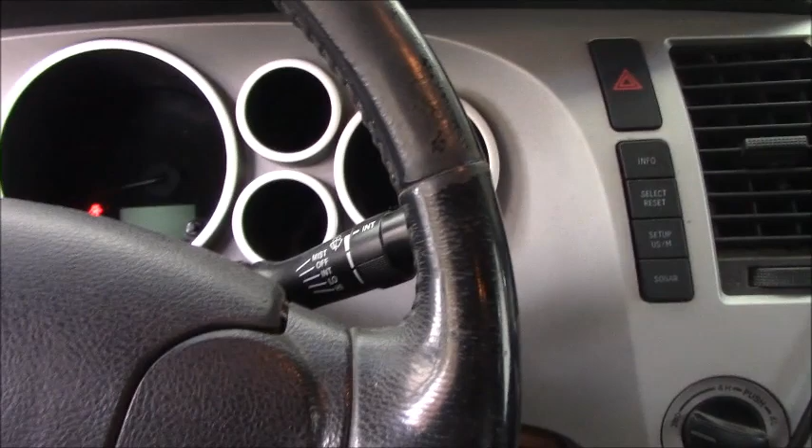So today we're working on a 2007 Toyota Tundra. The vehicle came from another shop with the complaint of no charging. As you can see right now, I will turn the key on. As you can see, the battery is something like 12 volts. You see the battery icon right there. So I get it started, and you can see right there on the gauge.

As you can see, charging and then back. So as you can see right now, the battery icon is lit on. What does that mean? That means it's telling you it's not charging, but the gauge seems like it's still 12 volts. Very interesting.

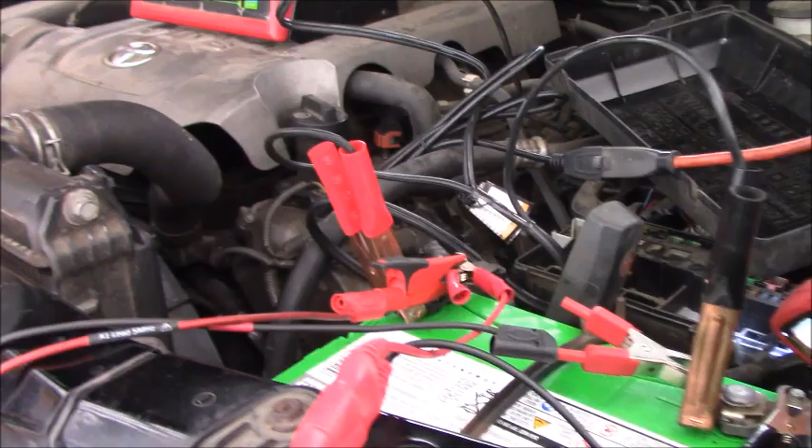So I have my charger hooked on the battery here. As you can see right now, the engine is off, and I measure here. As you can see right now, it's 12.4 with the charger on. So let's go ahead and start the engine, and measure from here to see if the alternator is charging or not.

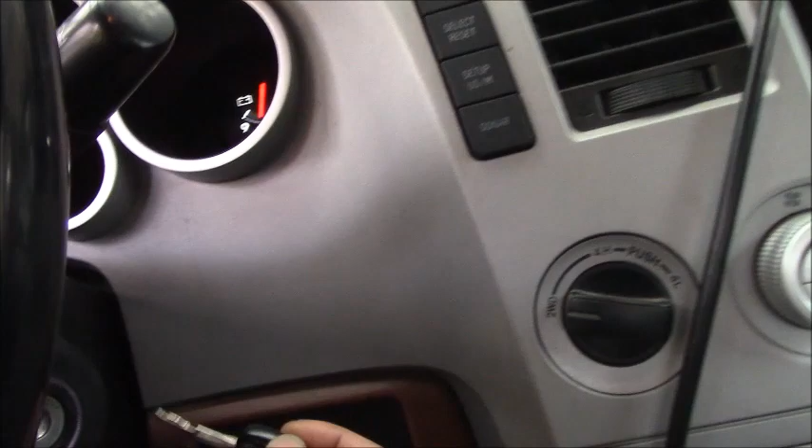Okay, as you can see, the battery light is on. You see the battery gauge bouncing back and forth and staying at no charge. Okay, so back out under the hood to measure. Sorry for the flare. As you can see right now, it's only 12.5 volts with my charger hooked on.

Let me remove this. As you can see the spark there. See that? That means the charger is charging the battery. Measure again. Right now it's 12.32. So let me put the charger back.

Okay guys, as you can see, after the problem, the vehicle has had a new battery put in, and I already removed the lower covers. As you can see right now, the mechanics put in a new alternator. As you can see right there, we have a new alternator, but still no charging.

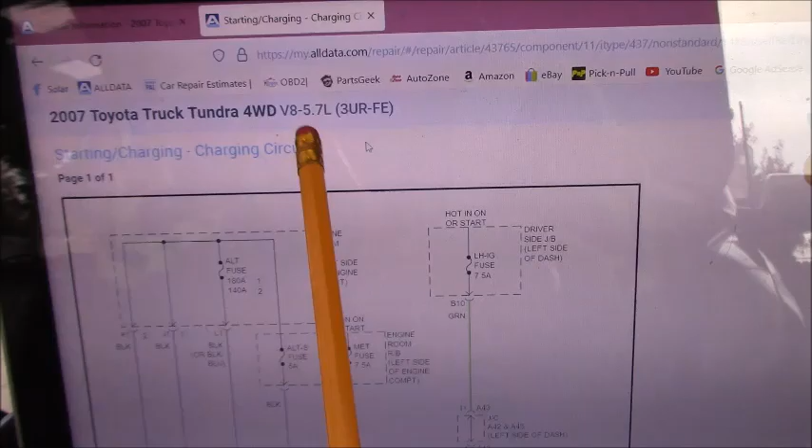Okay guys, accessing the wiring diagram. As you can see, 2007 Toyota Tundra 4-wheel drive 5.7 liter engine. The charging system is like this. Let me zoom out a little more so it's easy to see. This is the alternator. As you can see, we have this cable connected to the battery, with a 180 amp fuse.

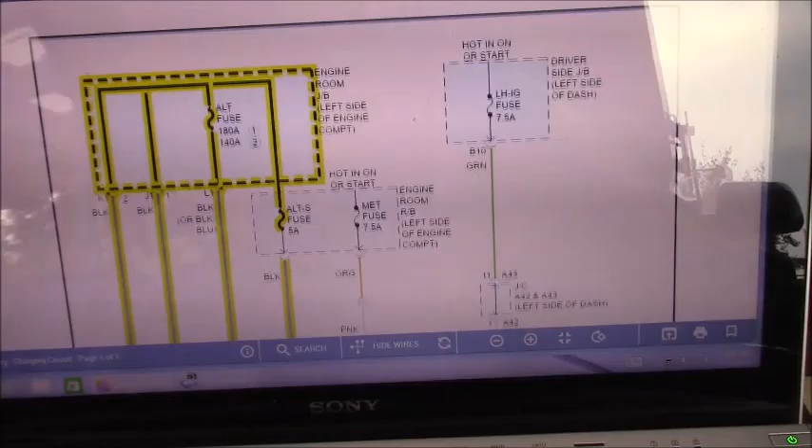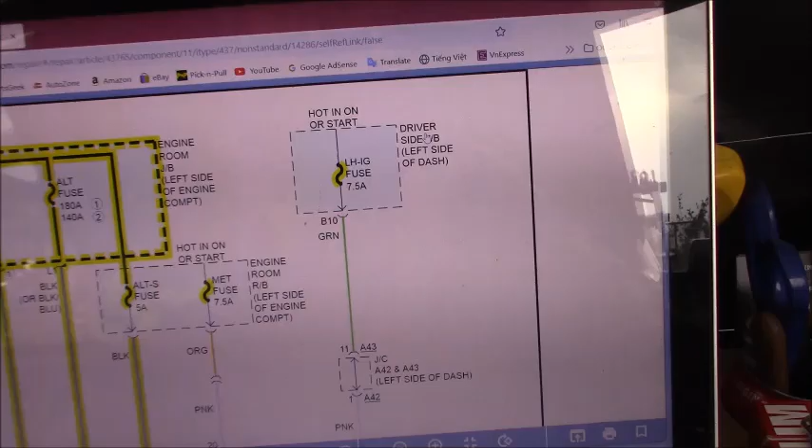So this fuse I already checked. We have the power here. This one's hot all the time, right? And this one I already checked, it's hot in run and start. And also this fuse, as you can see, is hot in on or start. Also checked it. This fuse is on the driver's side, left side of the dash.

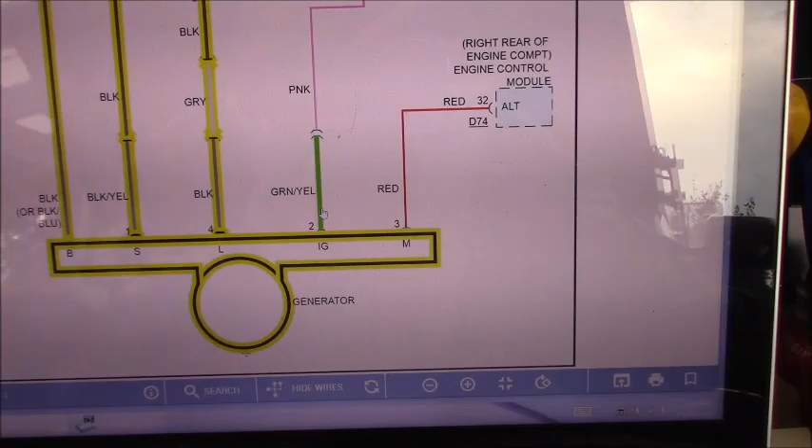That means we have two power supplies to the alternator, one with the black and yellow wire, and I also checked the voltage drop from here using the test light. We're okay with the fuses, no broken fuse at all, and we also checked here with the test light, there's no voltage drop, it's good. And also the green and yellow, checked for voltage drop with the key on, it's okay, no voltage drop.

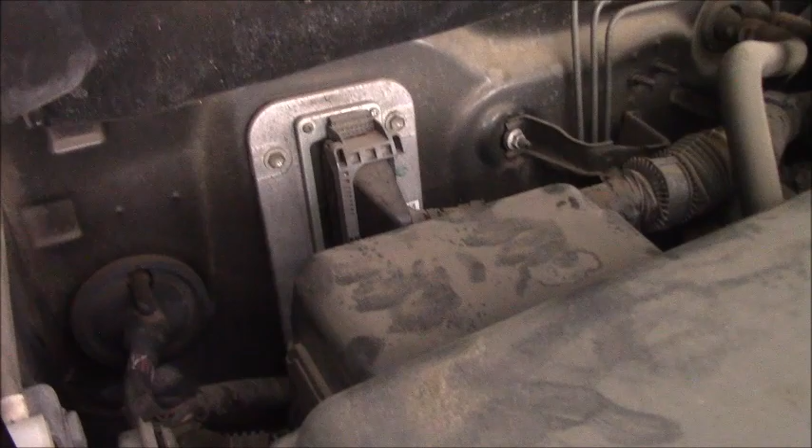But this red wire is controlled by the engine control module. It's right here in the engine compartment. Okay, this is the engine control module. So now, like I told you guys earlier, I checked all the fuses. Also checked the voltage drop on the wires, green and yellow, black and yellow, no voltage drop. We have good power supply to the alternator.

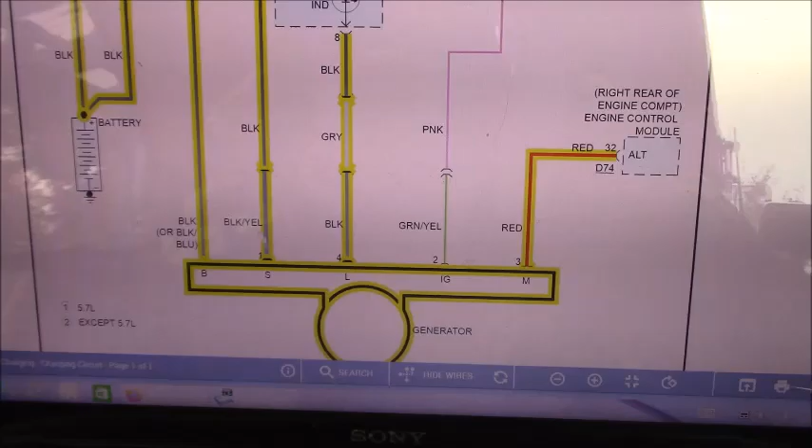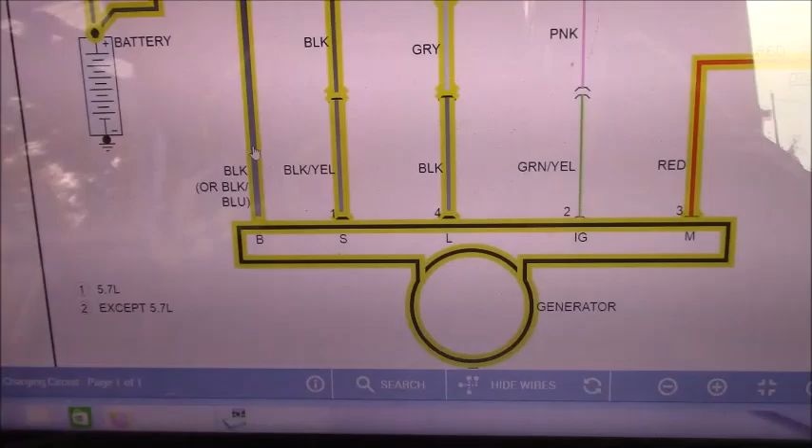And I also checked right here at the alternator, still no charging, not only checking at the battery, because if this wire is open, the black or blue or black-blue wire, there's also no charging. That's why if you check on the battery only, there's no charging, but sometimes it's charging right here. You have to check right here to see whether, when the engine runs, it's 14 volts or 13 something volts or not, in case this heavy wire here is an open circuit.

Okay, so this alternator is the new one. The owner told me the mechanic put the new one in, and it's still the same problem, it doesn't work at all. So now I'll try to hook up my channel here with my oscilloscope and see how the computer does the duty cycle on this wire to control the alternator.

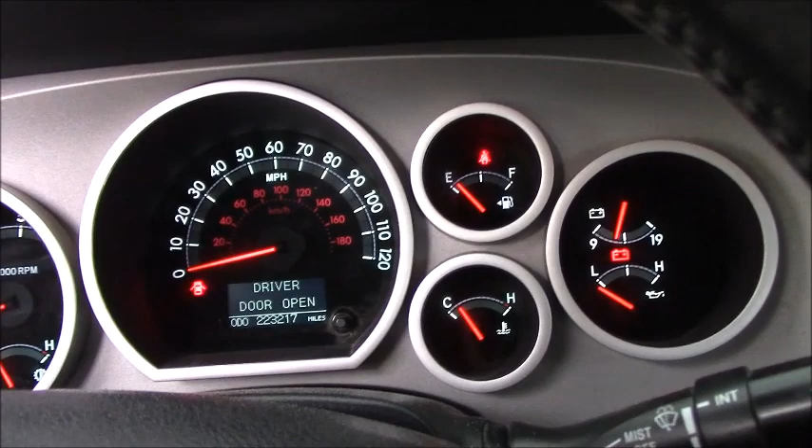Alright, okay guys, as you can see, the vehicle is not charging at all, no matter the new alternator and new battery. So let me start it again, and you see the battery light there, and the gauge is at about 12 volts. Let me start it.

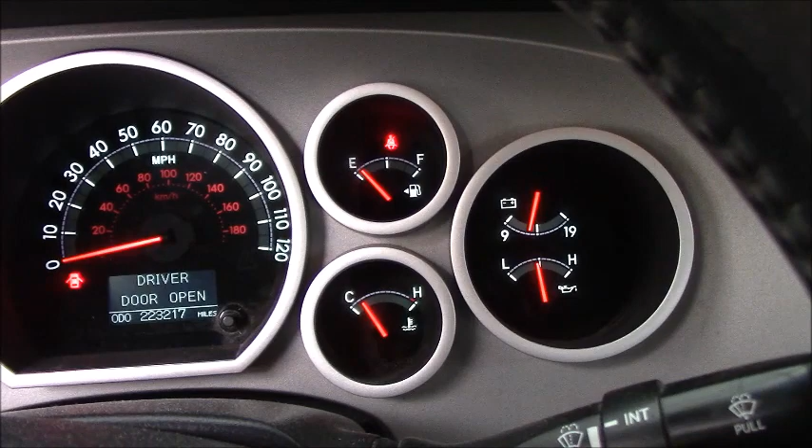You can see it looks like it's struggling to start, and then it starts, but why is the battery icon up? That's the question. Very interesting. So let me turn it back, key on, and

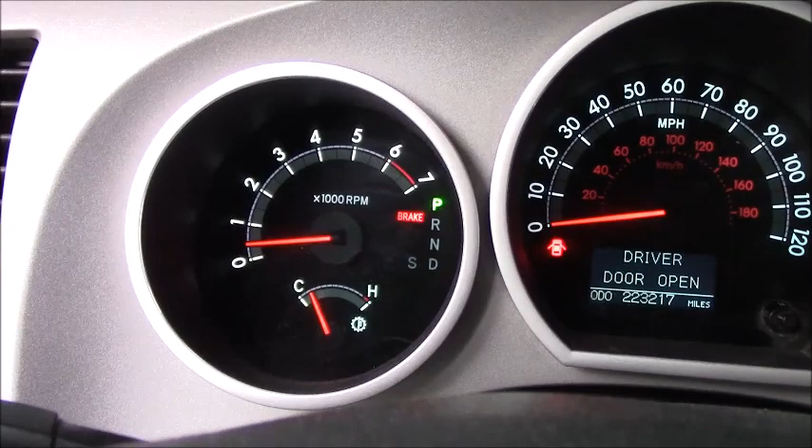in this case, like you guys see, the computer is involved in the charging system. So I know when the engine starts, there's no check engine light, like you can see the check engine light there. Let me start it. Yeah, no check engine light. Okay, no battery icon up here. So let's turn it off.

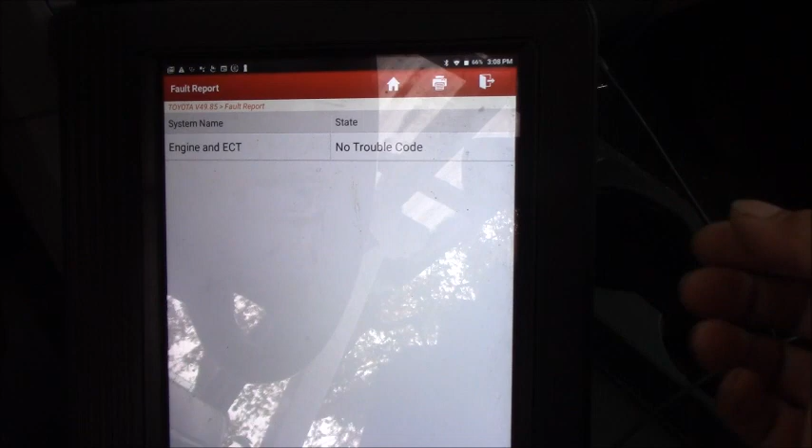Now I would like to know, no matter there's no check engine light, I need to read the fault code and see what the computer says. As you can see, no fault code. Okay, and anyway, no help at all. Okay, let me hook up to the...

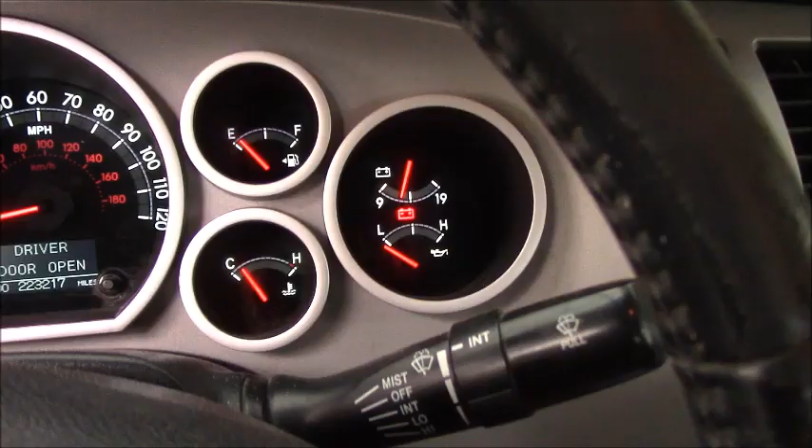Okay guys, now I run the PicoScope to see how the computer controls the alternator for the charging system. So I have channel A connected to the computer control of the alternator by the alternator connector, and channel B I connect to the battery, reading the voltage. Okay, as you can see, I have channel B connected here, and

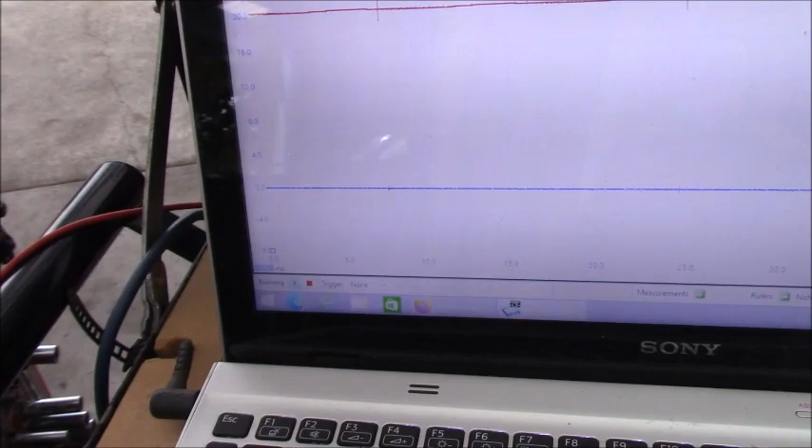it's right here. So on the battery positive and battery negative for channel B to read the battery voltage, to see any charging, because when we start the engine at first, as you can see, the battery gauge tries to increase and then takes a few seconds and goes back. So right now, channel A is reading 0 volts because the key is off.

Let me go turn the key on. Yep, right now the key is off. I can see from out there by my laptop. Okay, the key is on right now. From there you can see we have the duty cycle from the computer. And you can see we have the duty cycle, right? Channel B, channel A.

Okay guys, right now key on, engine off. As you can see, the computer tries to control the alternator, sending the duty cycle. The battery voltage is still there, and I will leave the camera here and go inside the car, start the engine. You can hear in the video the engine start. So look to see if the duty cycle control is still here or we miss it. Okay, I will start the engine right now.

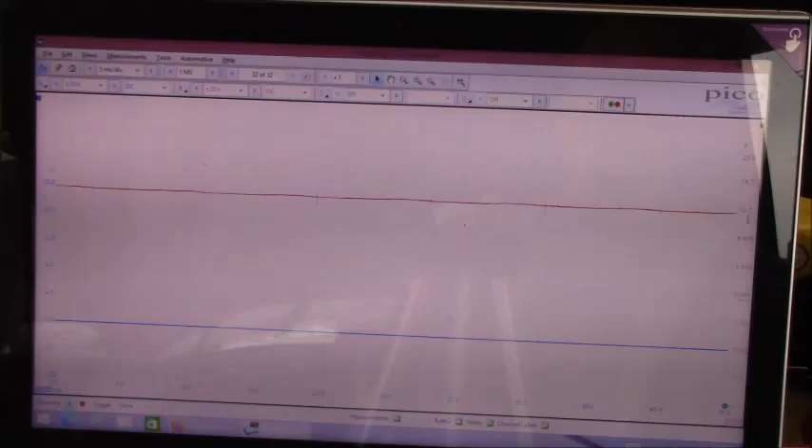Huh. Very interesting. So let me change the timebase to 5 seconds. As you can see right now, no, I can get this a little more, like 10 seconds. Yeah, 10 seconds is good enough for me. It's time to go back and forth. So I will rev the engine again, and then check on the laptop to see what it is.

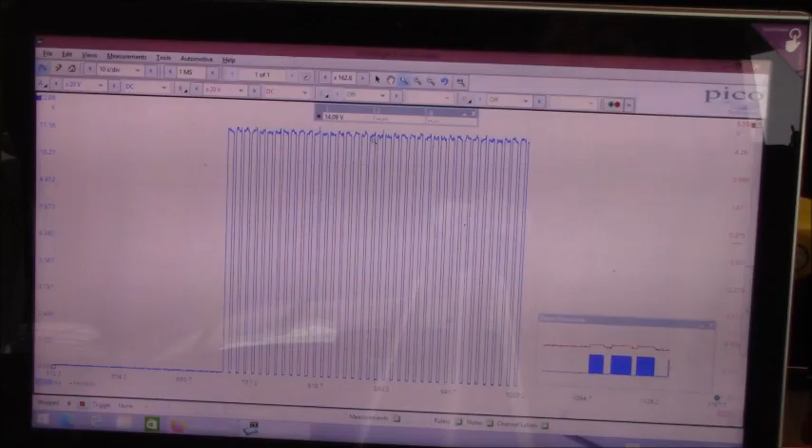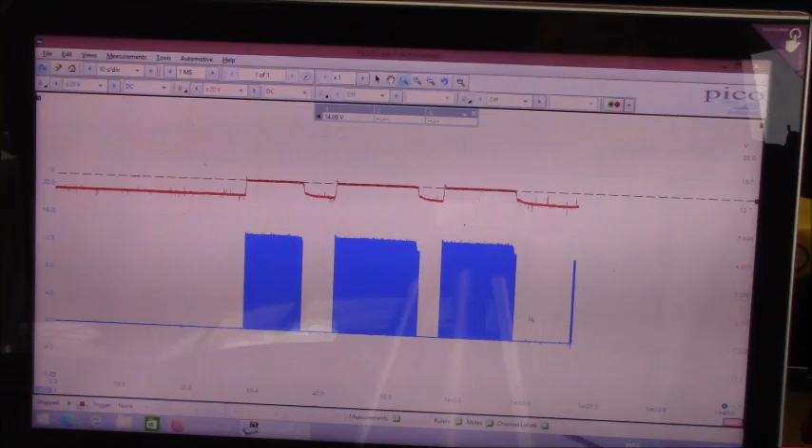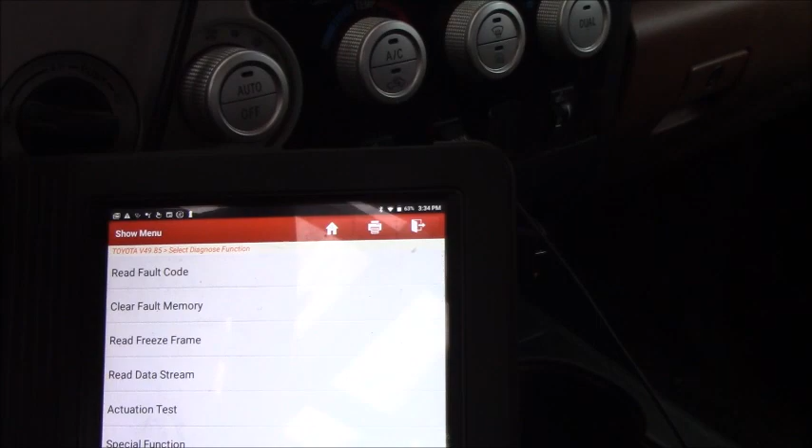Okay, the question now: did the new alternator fail, or did the computer stop controlling the alternator? Okay, let me see. Let me go back here on the scan tool. We pull up the data stream. Come on. Okay.

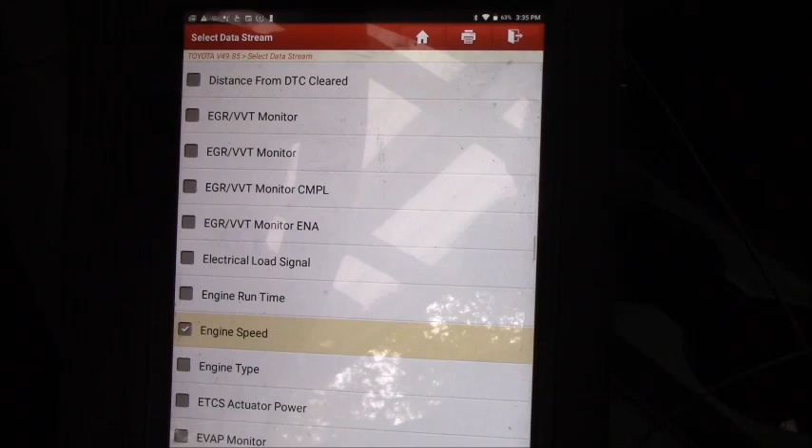Put the battery voltage, and we put where the letter E. Engine speed. Okay, that much I want to see. Okay, as you can see right now, the engine stopped. It stopped by itself, I didn't turn it off. So let me move the chair far enough for me to use the pedal. Okay, as you can see right now, I can start it.

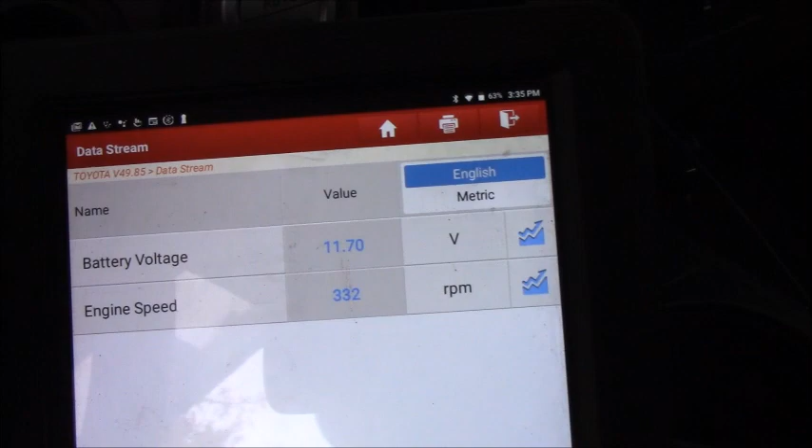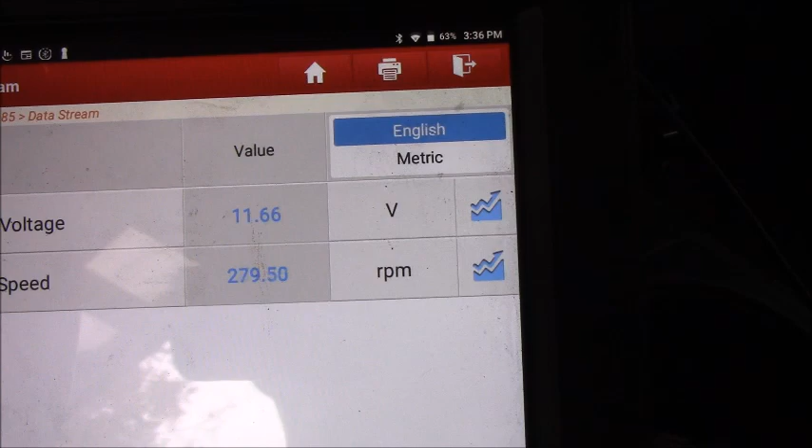As you can see, the idle of this engine, and you can see the idle here. The idle here, that's why it doesn't start. Why this car, the idle is too low, that's why it doesn't charge the battery. Okay, now I found the problem. Okay, let me rev the engine up a little. Oh, it stopped now. Let's start again. Okay, at least we have 600 RPM.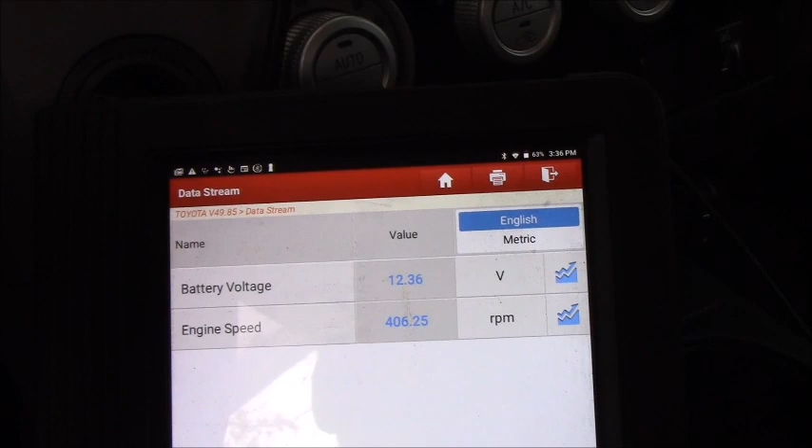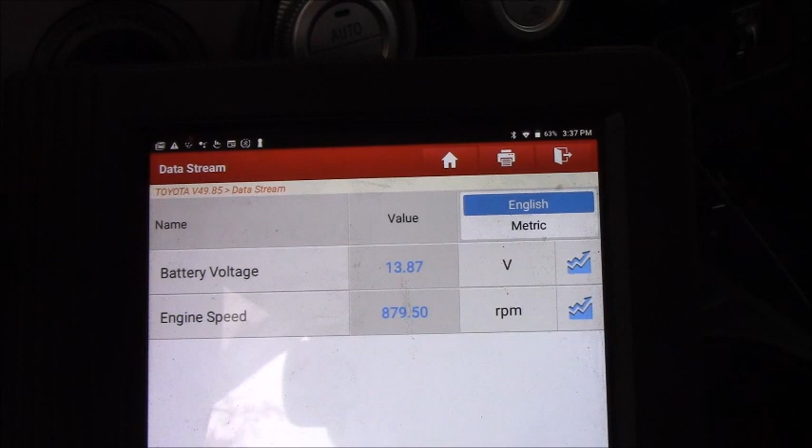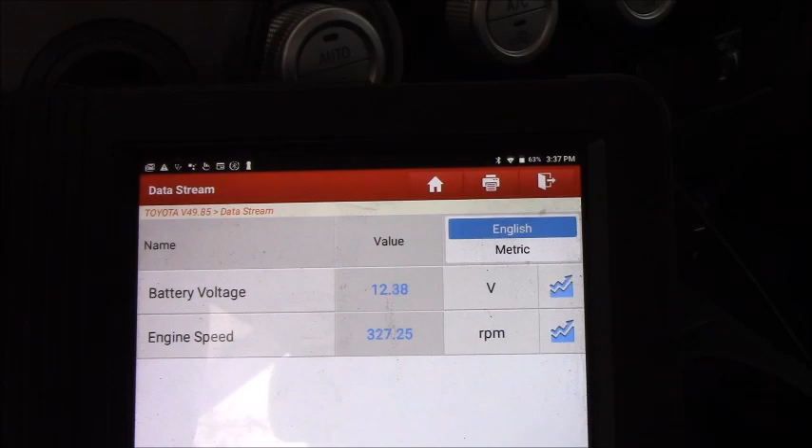Okay, now you can see 13 point something volts right there. As you can see, it's almost in the middle, that means it's charging. Okay, as you can see the RPM now, I cannot hold it steady at 600, but I believe at 600 it is charging. Okay, now it's charging, you guys see that.

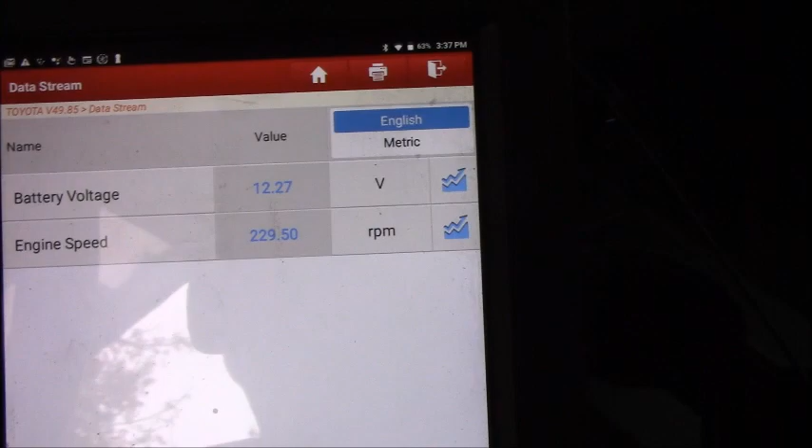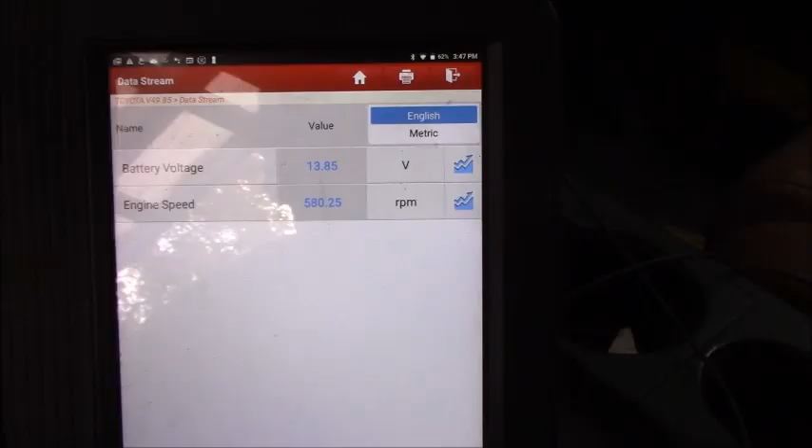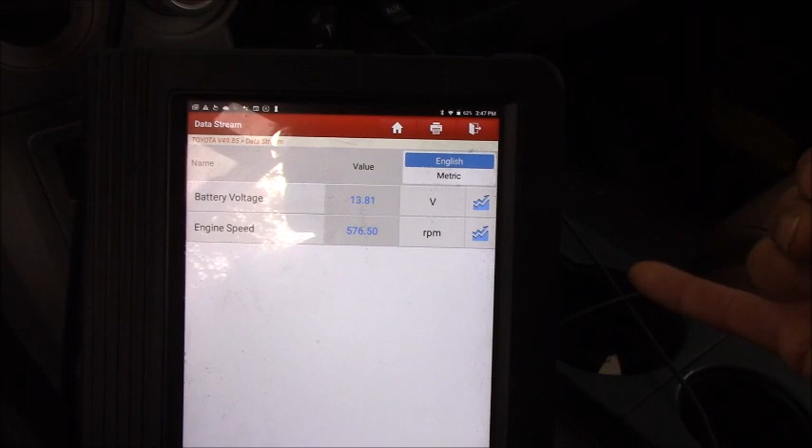Okay, let me do this. Turn off the engine first. The engine is off now, key on. Let me go back from here, go to special function. Damn, we don't have the idle learn for this. Okay guys, as you can see, I'm looking for the function to relearn the idle on this vehicle, but it seems we don't have it.

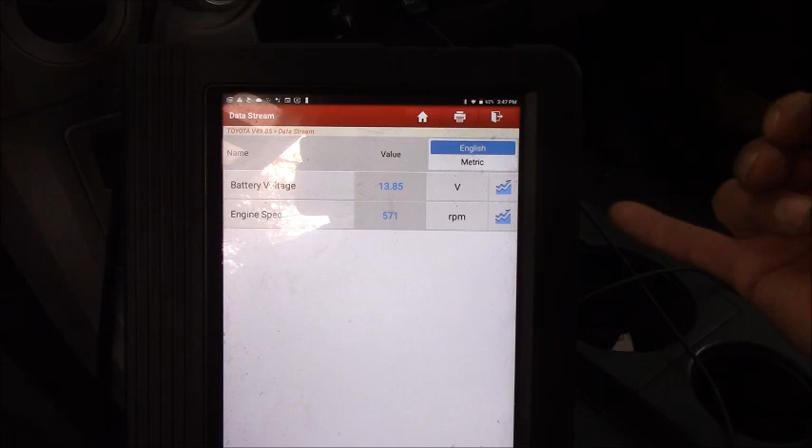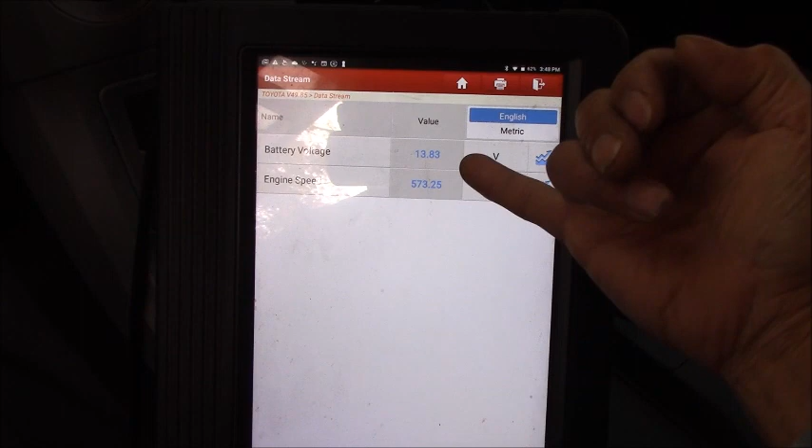The way I know Toyota, after you change the battery or disconnect the battery, sometimes you get a problem with the idle. And in this case, from the beginning, I didn't see the idle was too low. I didn't pay attention to that, and now I found the idle too low, that made the alternator not charge at all. And as you can see right now, 5 something RPM. Why? Because I want to let it run like this. You see 5 something RPM, the alternator is charging the battery. Right now 13.8, almost 14 volts, is good.

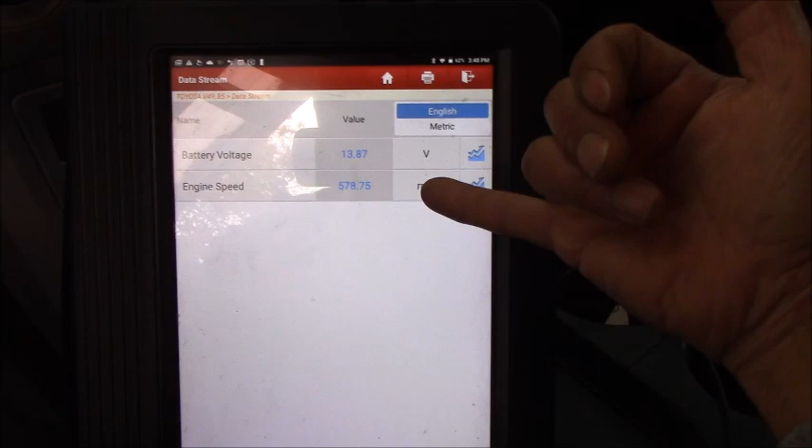And how I have this RPM right now is because I use the pry bar. I set it on the pedal and against the seat, move it a little bit and let it run for about 10 minutes to see. I think the idle will go back. Right now you can see it's 5 something RPM. Okay, back to the laptop, and you can see it's charging. Right now charging, you guys.

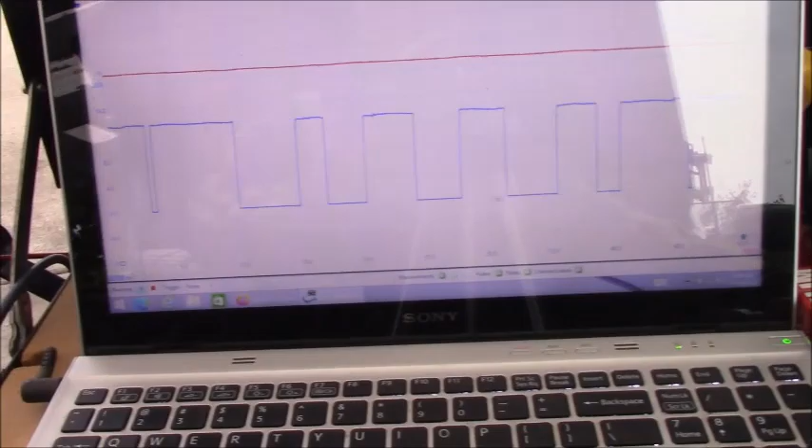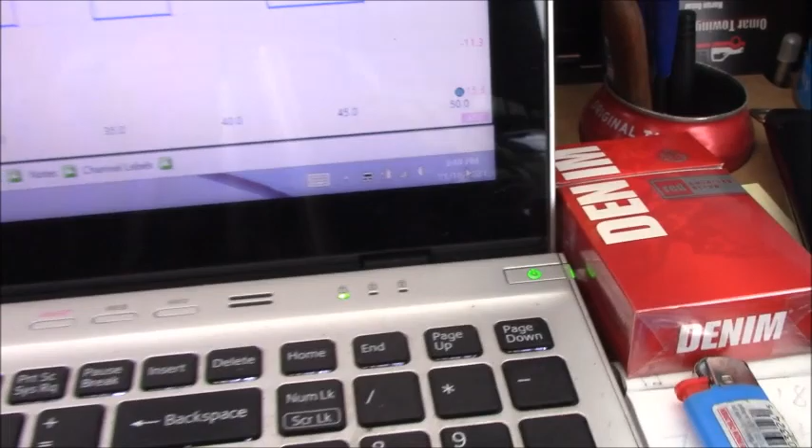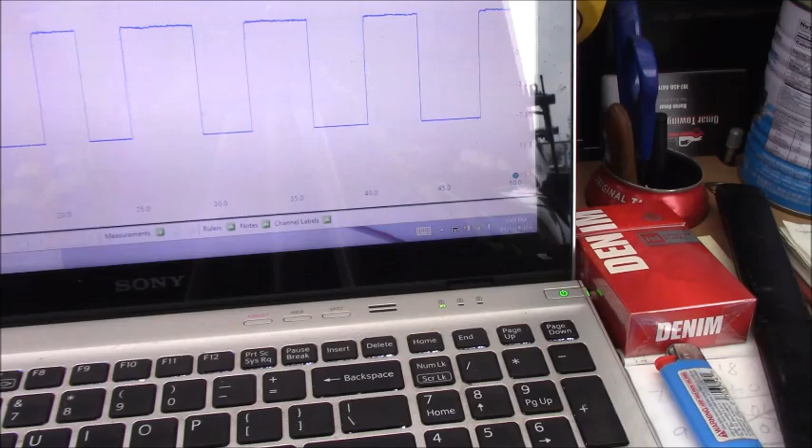And let me see the voltage here. Yeah, about 14 volts, right? 14.2 volts right now, and the computer controls the duty cycle. Okay, right now, it's 3:49. I will let the engine idle for about 10, 15, 20 minutes, and hopefully the idle goes back to normal. 3:49 p.m. right now. So let me come back with the camera after about 10, 15, 20 minutes. I will take the pry bar out, let the idle run normally, and then see if it's still charging or not.

Alright. Okay guys, back after a while. As you can see right now, it's 4:12 p.m., and that means 22 minutes running at high idle. I kept an eye on my laptop and I see continuous charging, no intermittent, no loss of charging at all. So now go back here. As you can see, it's still 14 volts. You see the lines together, right? Yeah, 14 volts charging. Duty cycle is good.

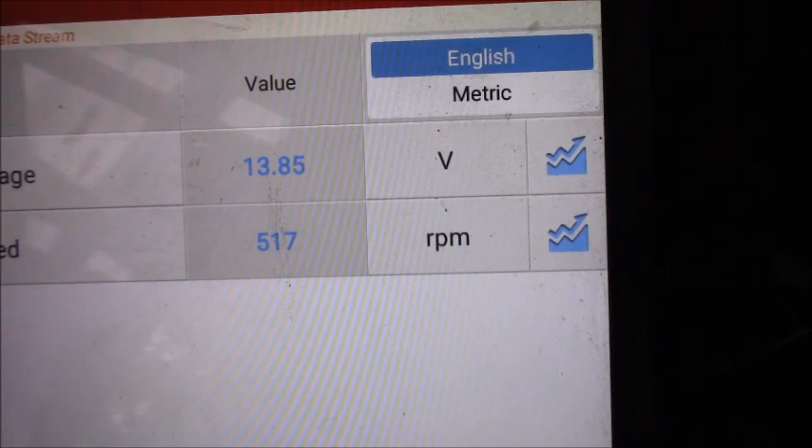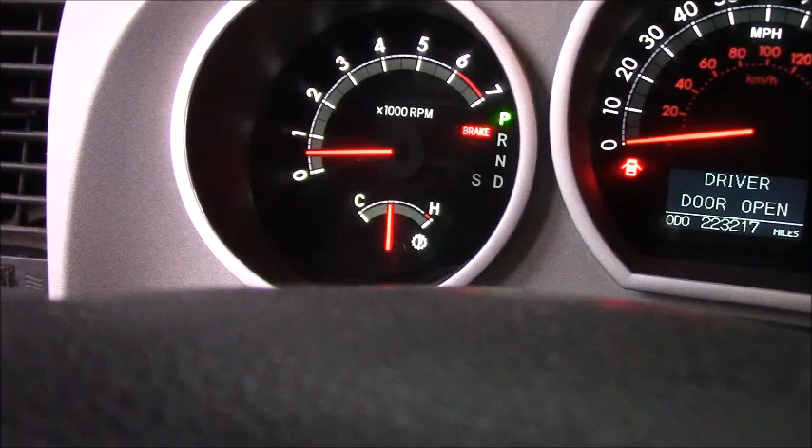And also I have the meter here. As you can see, right now it's 14 volts. Okay. Back in the car. As you can see here, the idle is at 5 something, sometimes 4, 13 volts charging. Okay. As you can see on the RPM, it's about 500 RPM, in the middle between 0 and 1. And now you've got to keep an eye on this. I took the pry bar out, okay?

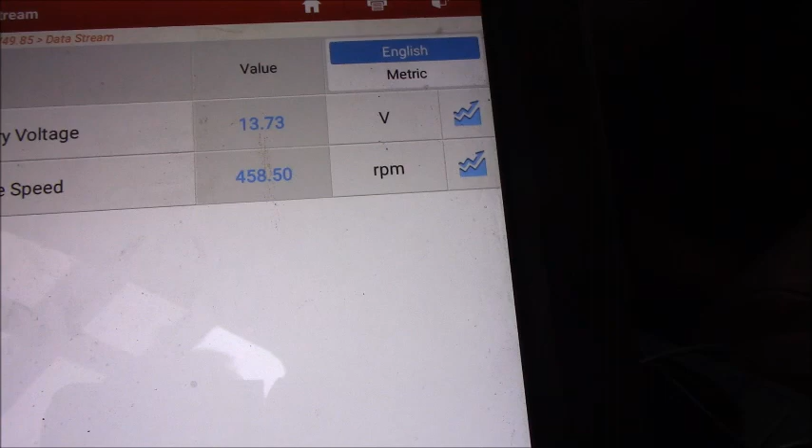So the idle seems to be higher than before. Tap a little bit. Before the tap, as you guys can see, it seemed to be like 300 something RPM, and now it's still less than 500 RPM. I don't like that at all. Right now, as you can see, the pry bar is up.

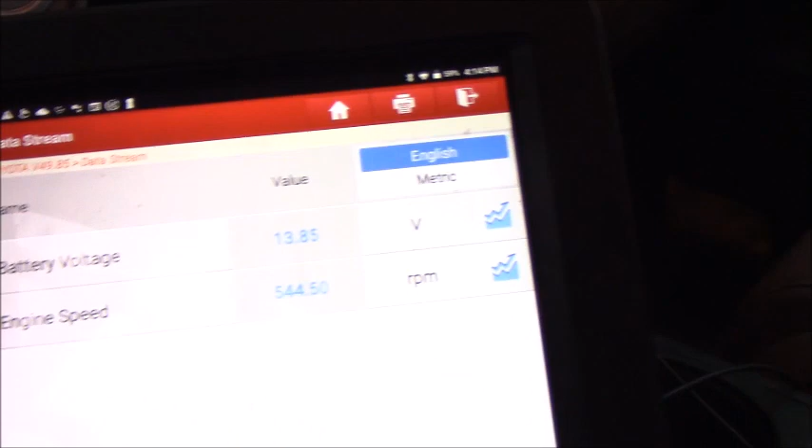Okay, so you see the needle in the middle, so it's still charging. Okay, let me go back to the laptop. As you can see, it's still charging. Okay, but let me do this to see if it's still charging or not. Now I turn the engine off. Okay, the engine is off now. Let's wait for 10 seconds.

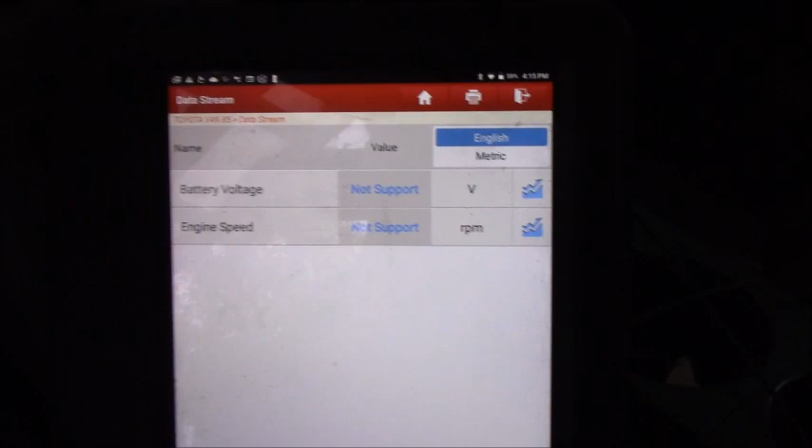Yep, my scan tool says not supported for now. Okay, 1, 2, 3, 4, 5, 6, 7, 8, 9, 10. You have more than 10 seconds. Okay, always guys, turn off the key, wait for at least 10 seconds. Now start it back up. Let's see.

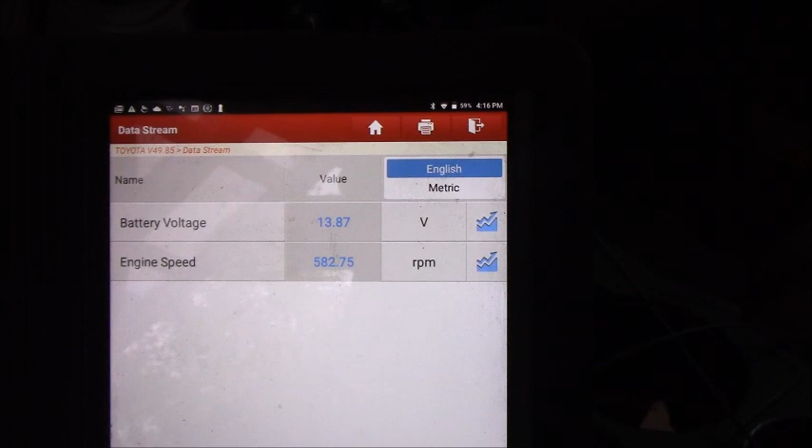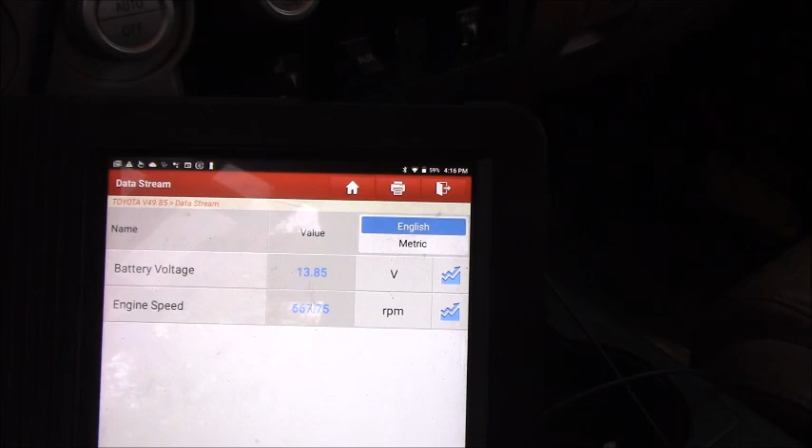Now I have the idle at 500 something, almost 700 RPM. Okay, that's a good idle for now, guys. You know, after we relearn, you have to wait with the key off at least 10 seconds and turn it back on.

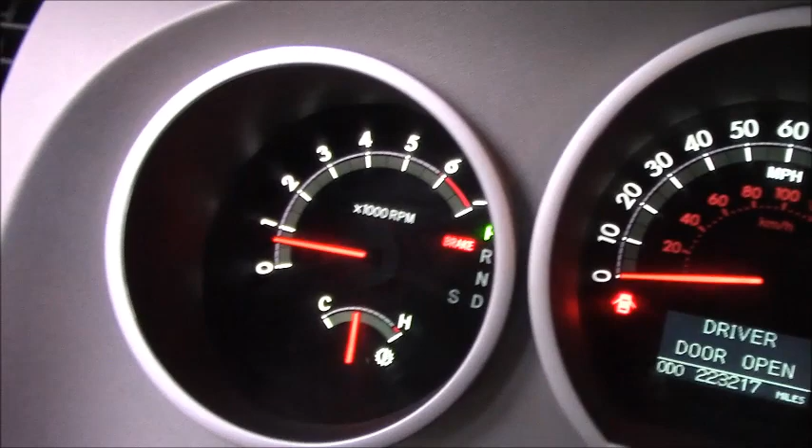So now we have the good idle, and then you can see right there it's charging good. You can see right here the needle in the middle between 9 and 19 volts. That means around 14 volts. Yep, right here on the scan tool it says almost 14 volts. Idle 700 something. And back to the laptop,

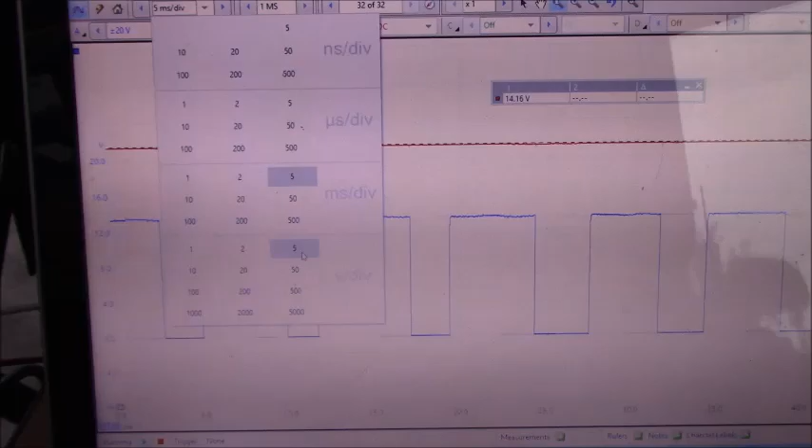you see, okay, it's still charging. You guys can see right here it's still 14 volts. You see the red line, yeah, right here, exactly there, 14 volts. And the duty cycle, if we change the time base to 5 milliseconds, you guys can see that it's running well.

Okay, I can stop here and then zoom it out. Yep, zoom it out, zoom it out. Okay, good. I don't need it anymore. And change back to 5 milliseconds and let it run. Yeah. Okay, go ahead, go inside the car. And then turn it off again.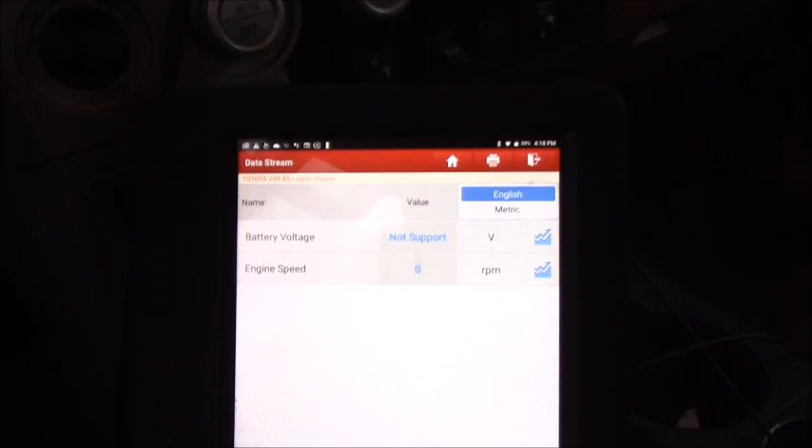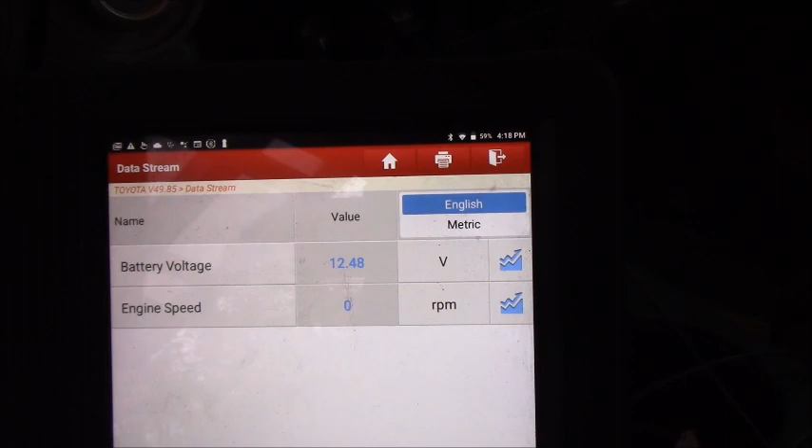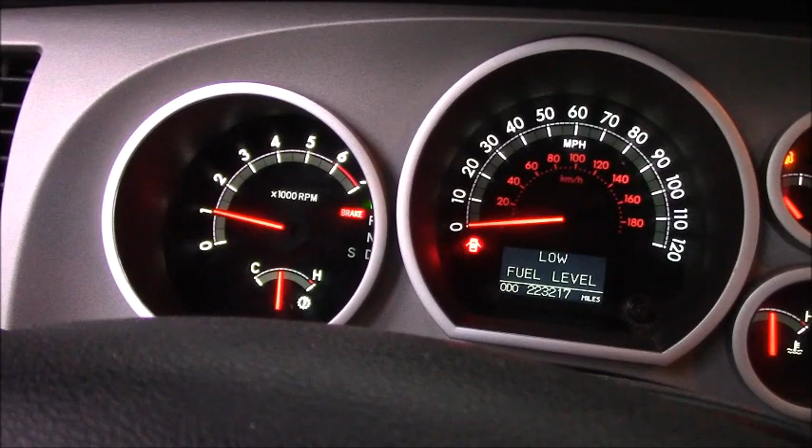Wait for 10 seconds. Not supported. 1, 2, 3, 4, 5, 6, 7, 8, 9, 10. So 10 something, almost 15 now. Okay, start it up. Yep, you can see it's key on, the battery is 12.48 volts. Engine RPM is 0 because it's key on. Okay, start it. Good idle now. I love it.

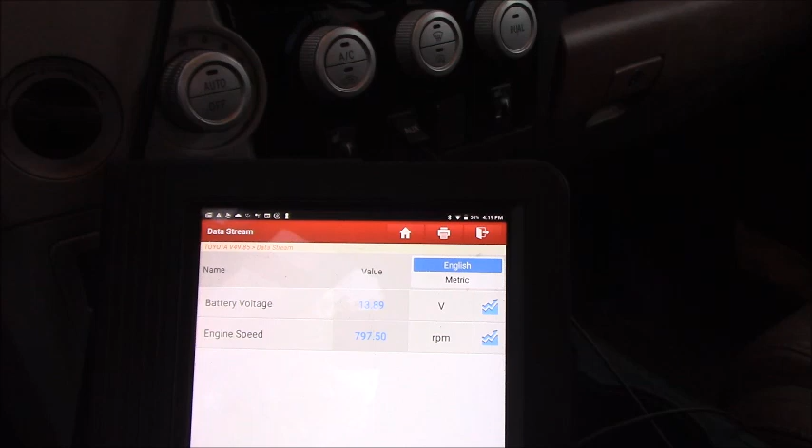Okay, now we got the idle. Let it steady, see what's going on. Yep, the idle is around 700 something RPM. The battery is charging good now, as you can see. Let me rev the engine and release the gas pedal.

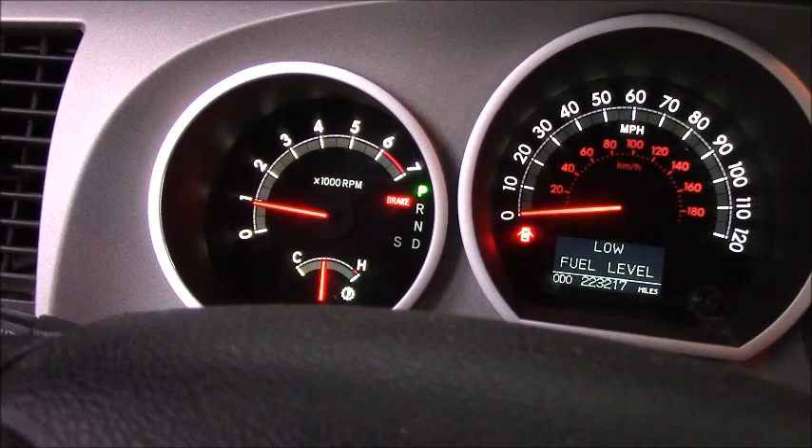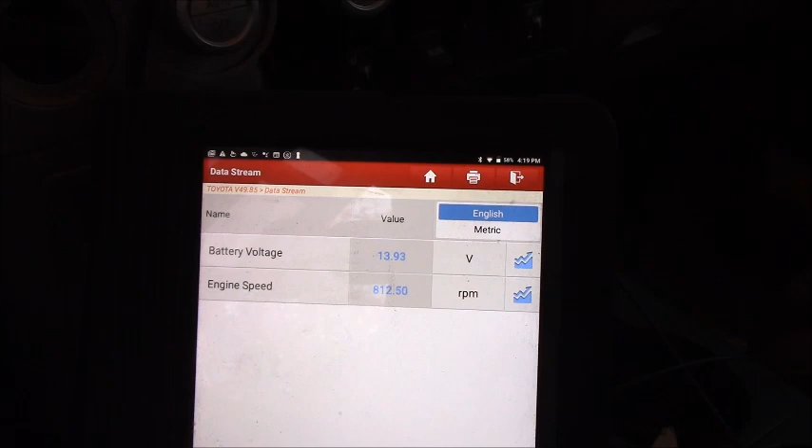Okay guys, we have a good idle, good charging now. As you can see, 3 different locations, maybe 4 different locations you guys can check for charging. You can see on the scan tool 13.93, almost 14 volts, idle 700 right there.

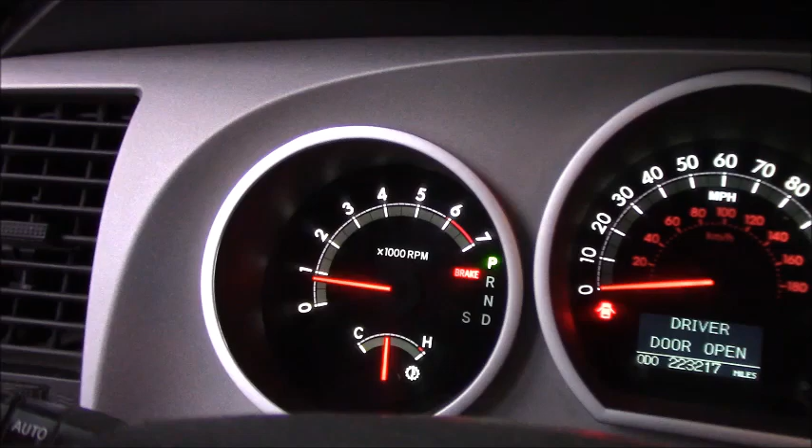And one more location here to check for us when the engine runs, charging. See, right now it's 14 volts. Okay, that's it guys. Don't be a parts changer. Again, don't be a parts changer.

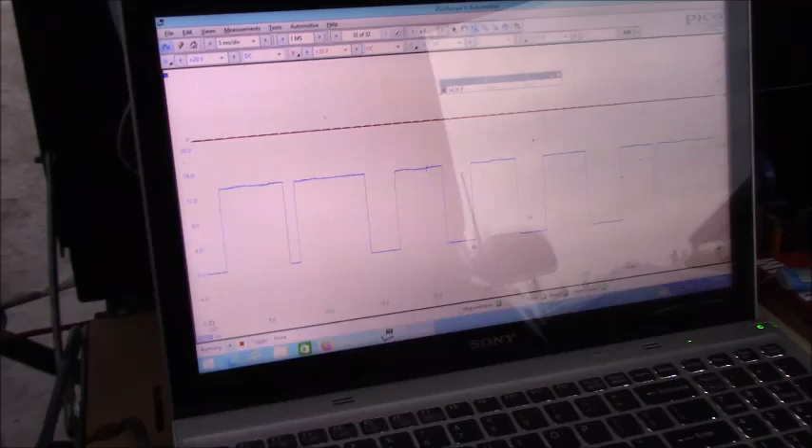I don't know what's wrong with the old alternator. The mechanic changed it, and after that somehow the idle was low like that. And then on the Toyota, sometimes when you guys change the battery or disconnect the battery for some reason, you might lose the idle. You have to learn the idle again.

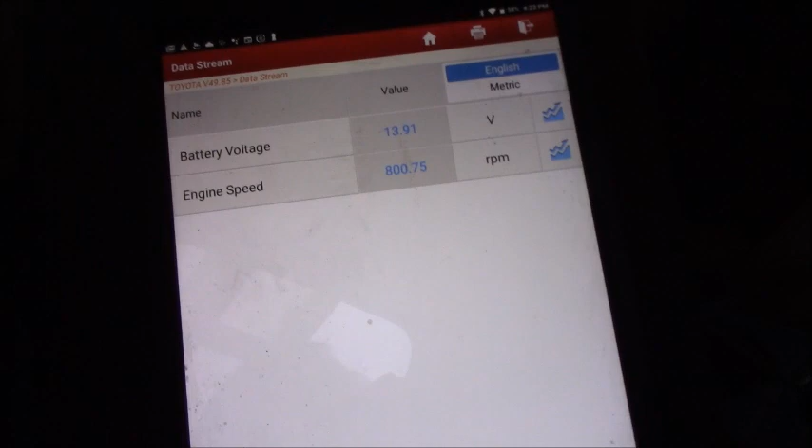So the scan tool on this model doesn't have the function to learn the idle, and I have to do it by my procedure, as you saw right there. Sorry, to the gas pedal. Hard to hold it steady at idle. You have to use the pry bar on the pedal stick here to move it a little, like that, until you see on the scan tool the idle is around 800 something, and leave it like that.

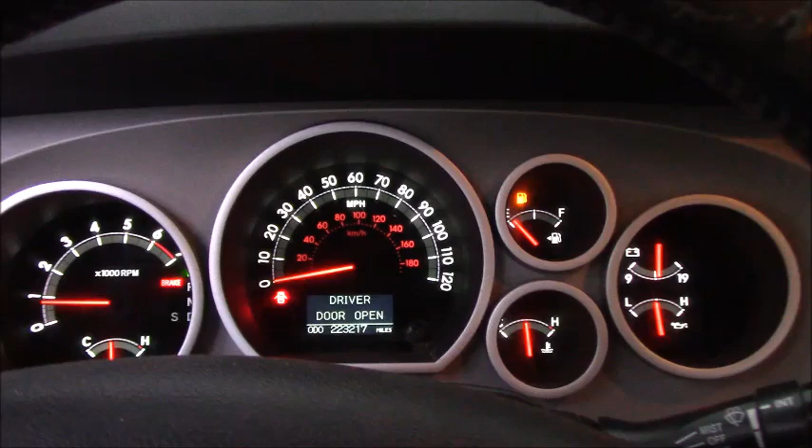Run it for a while, at least 15 minutes, and the idle comes back. Some come back to the right manufacturer idle, some not; you have to turn off the key, wait for at least 10 seconds and turn it back on, and then it will fix the problem. In this case, the problem is fixed.

Okay, again, don't be a parts changer, guys.